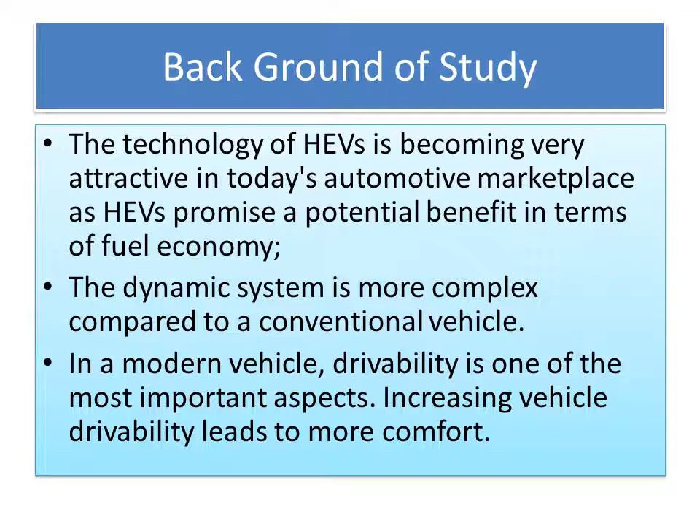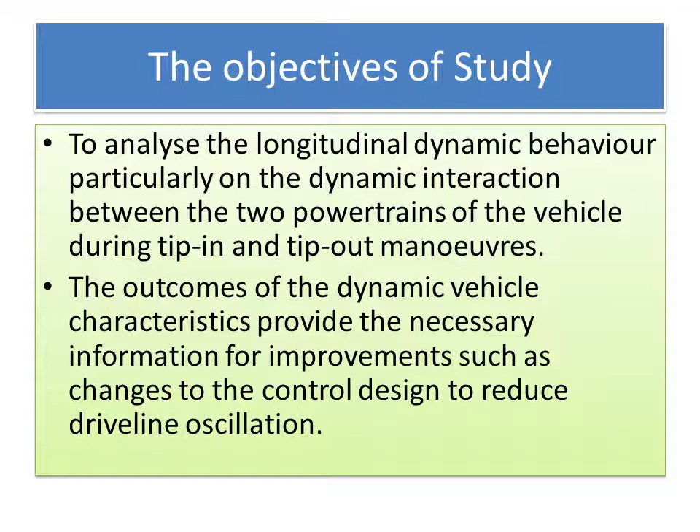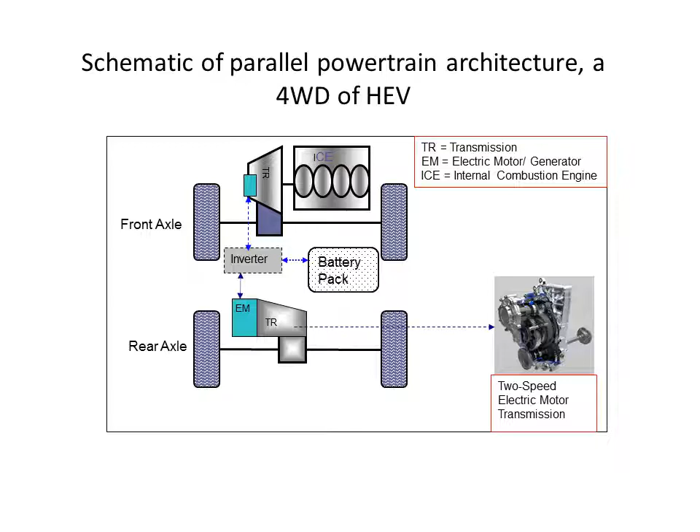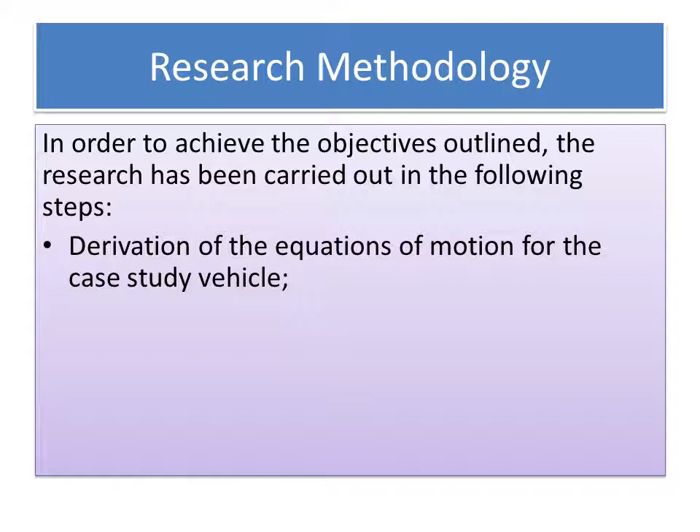Next, the research methodology. The research has been carried out in the following steps. Step 1, derivation of the equation of motion for the case study vehicles. The outcome of this step is a mathematical model of vehicle dynamics. Step 2 is vehicle modeling and simulation during tip-in and tip-out maneuver. MATLAB and Simulink was used as the software tool to develop a dynamic model of the vehicle system in order to mimic the behavior of the case study vehicle under controlled operating conditions.

Step 3 is vehicle simulation for the sensitivity analysis of vehicle response for varying torque distribution on the front and rear axle.

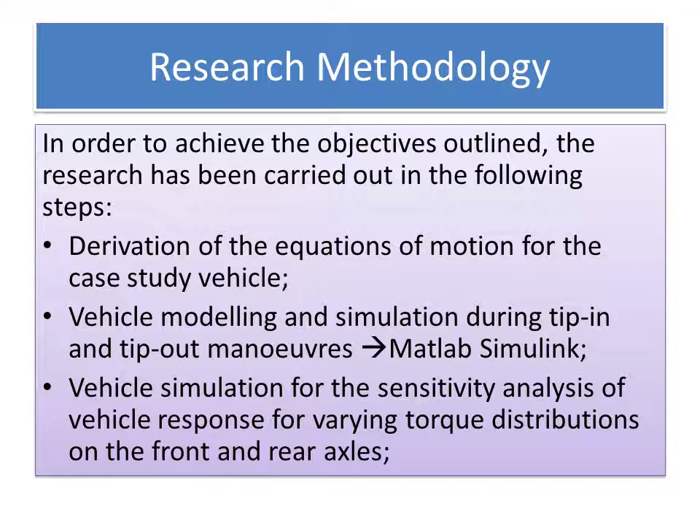Result. A sensitivity analysis was performed to evaluate the effect of the torque distribution between the front and the rear axle on drivability with the same overall value of wheel torque.

To calculate the torque demand in order to give the required wheel torque distribution and overall torque, the model first computes the required steady-state value of the total front and rear wheel torques during a maneuver for the assigned accelerator pedal value. The model then calculates the internal combustion engine and electric motor torque demand in steady-state condition to provide the target wheel torque distribution level whilst retaining the required total steady-state wheel torque value.

The torque distribution ratio was designed starting from ratio 100% internal combustion engine and 0% electric motor up to ratio 0% internal combustion engine, 100% electric motor, by decreasing 20% EM and IC as well for every step.

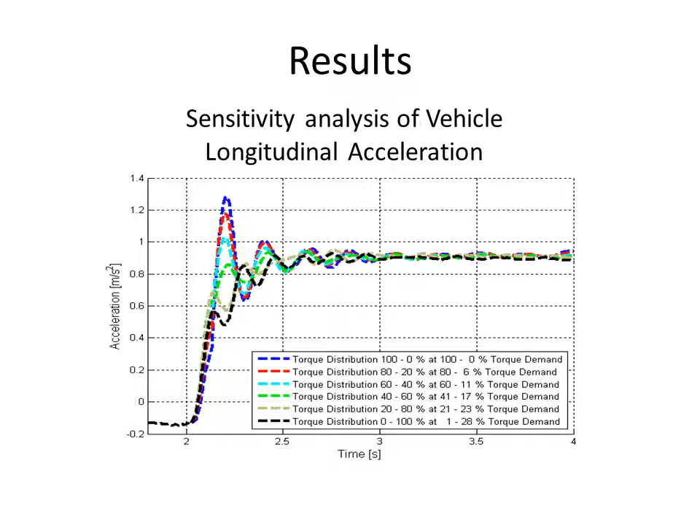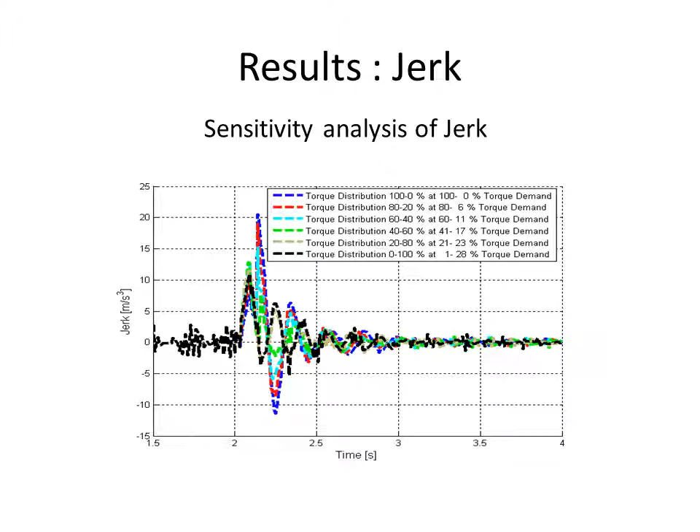Result: sensitivity analysis of speed. This figure shows the speed profile for two maneuvers where the torque distribution on the front and rear is 80% internal combustion engine and 20% electric motor, and the other is 20% internal combustion engine and 80% electric motor. The speed of different components at the wheel, such as the engine and electric motor, are referred to the vehicle speed.

The engine speed is divided by the selected gear ratio and differential ratio and multiplied by the wheel radius. As a consequence, the figure shows the concurrent evaluation of the torsional dynamics of both powertrains during the tests.